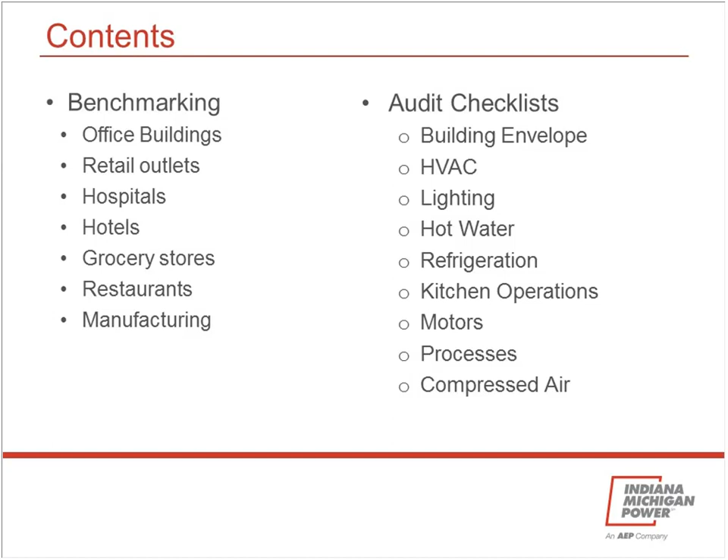And if you don't see your segment here, I'm sure there's one that's going to be very much like these, so you can slightly extrapolate for that. Then at the end we're going to leave you with a very practical checklist of things to look for to uncover energy savings opportunities in your facility. You can put these on a clipboard, walk around your facility, and check off the number of things we have in these areas. So with that, let's go ahead and start and talk about one of the most ubiquitous areas of energy consumption.

That is with commercial buildings. One of the benchmarking sources you can use out there is the Commercial Buildings Energy Consumption Survey, we call it CBECS, and it's been updated recently. Now, you might not be impressed by how early it's been updated, but the old data was from 2002. Now we're up to 2012, and there's distinct patterns of change over those 10 years.

There's generally less electricity consumption per square foot, and the mix has changed. Lighting has dropped quite a bit as a percentage share of total electricity consumption. I've put together a list of business segments here with average kilowatt hour per square foot consumption, the median, and the 25th percentile, where you'll be performing better than 75% of your peers. You can use these numbers to benchmark your facility's performance.

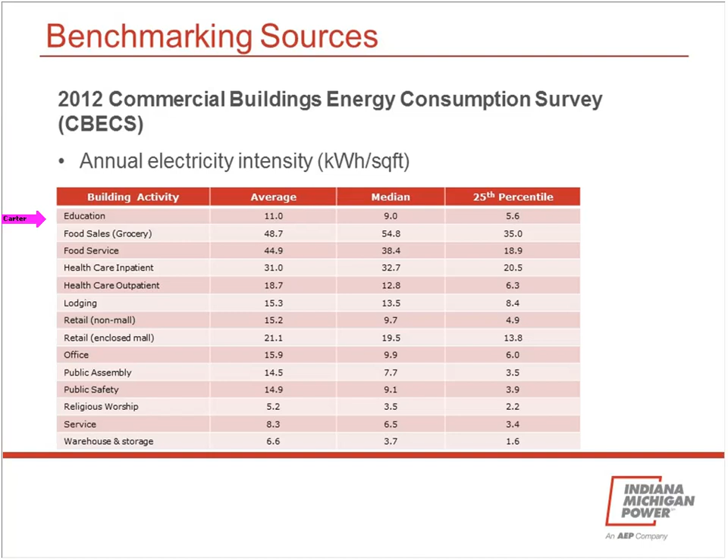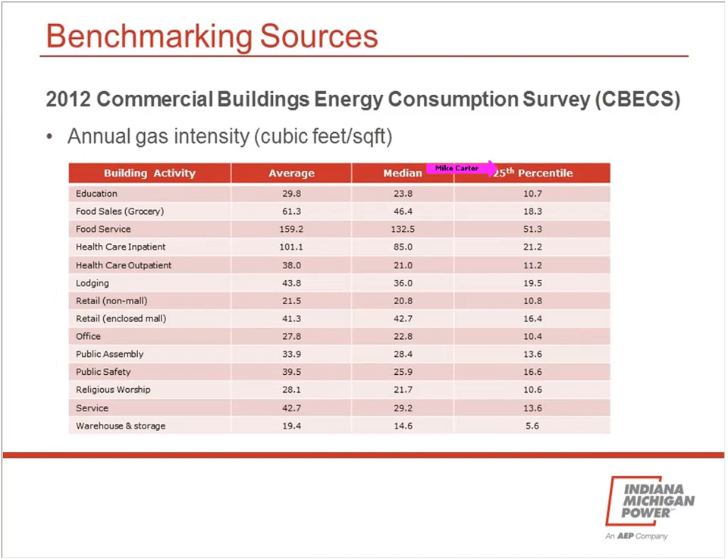We also included gas intensity. Most of you have gas as well, so I thought that might be helpful. Did the same thing: average, median, 25th percentile, in cubic feet per square foot of facility space.

Almost all of us have office space, even if you're a manufacturer. So we're going to start with that area and take a look at where energy consumption is happening in office environments. Here's the CBECS data for offices.

First thing we want to look at is, what's the overall energy benchmark here? Just short of 16 kilowatt hours per square foot total, and that's an average. Being in the Midwest, we'll kind of be in that average, though it will probably be more for southern states with higher HVAC needs, and a little less for more northern states. But that's a pretty good number.

The second thing you want to look at is, where is it being consumed? Here's a breakout in this pie chart. Ventilation is a fourth of it. Office equipment and other are both pretty much plug loads, which is a big part of that as well. If you look at ventilation and cooling, the two blue areas here, you can see that consumes about half of the office space.

Now, it used to be lighting was much higher; right now it's 16%. It used to be 30-40%, but this is 2012 data, so it really reflects just the upgrade from T12s to T5s. Today, that lighting percentage will probably be even less with LED lighting being implemented. So HVAC and plug loads are two big areas you probably want to look at for opportunities.

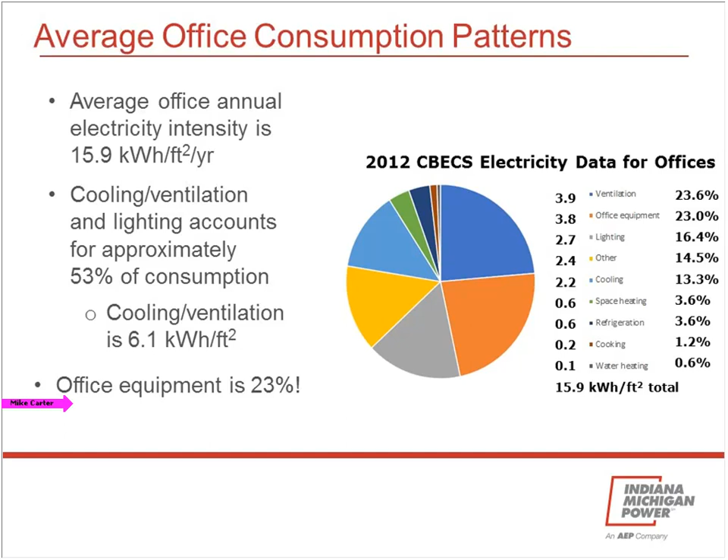So how do you use this data? Well, just take your electric bill, take an annual number. Let's say it's 1.6 million kilowatt hours of use, and you have an 80,000 square foot facility. That gives you your 20 kilowatt hours per square foot. Compare it to that 15.9 kilowatt hours per square foot average, and you can see that, well, possible improvement opportunities should be available there.

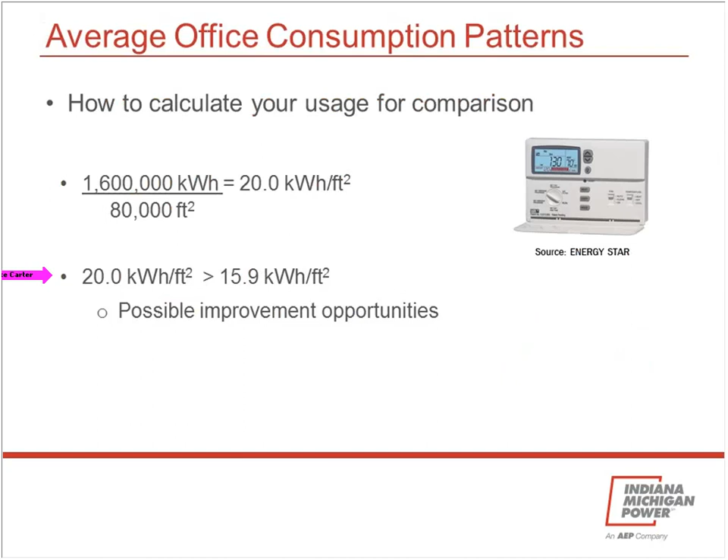And you can go to management with a hard number like this and justify continued use of resources and money to do so. If you wanted to see which area is the biggest opportunity—is it HVAC, lighting, et cetera—well, there's a couple things you can do, kind of a back-of-the-napkin type analysis.

Here's one: if you heat with natural gas, then your electricity usage is going to be pretty steady year-round for things like lighting and computers, et cetera. And the biggest difference will be in the HVAC, the air conditioning system.

And if you plotted cooling load hours—total hours that your equipment is going to operate at full capacity—mathematically, it's going to operate more hours total, but at reduced capacity, giving you an equivalent full capacity load hours versus time.

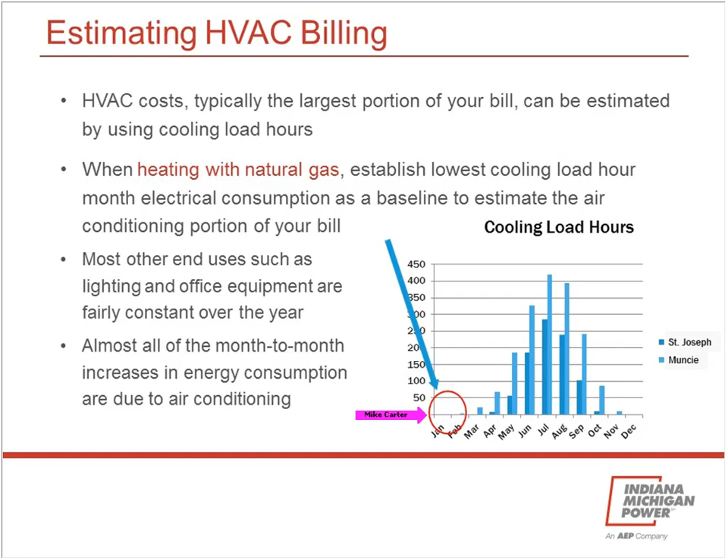You can see here that, of course, most of that occurs in the hot summer months, but in the winter months—January, February, December—hardly any, maybe a little bit. So you can say, well, I know that the biggest difference from a baseline is going to be attributed to HVAC for air conditioning.

So what you can do is take your energy consumption—this is kilowatt hours, thousands of kilowatt hours. This is an example, so it'd be very low in January, February, very high in the summer months. Total in this case, 1,500,000 or 1.5 million kilowatt hours.

And if you took, say, a rule of thumb of 80% of your winter months here, where you shouldn't expect much air conditioning, use that as a baseline, then subtract the actual minus that baseline. This difference can be attributed to your air conditioning. Now you can say, well, on this basis, I consume about 750,000 kilowatt hours in my air conditioning system over 80,000 square feet, and that's about 9.4 kilowatt hours per square foot.

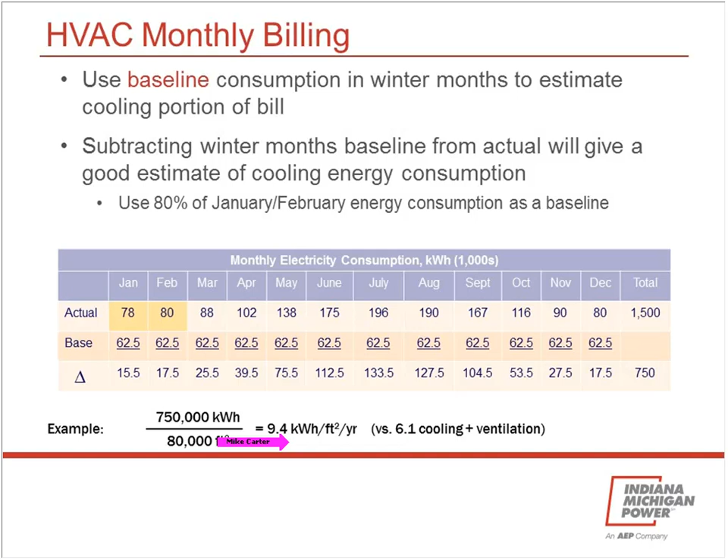And if you saw on that pie chart, HVAC, cooling, and ventilation together were about 6.1 kilowatt hours per square foot per year. Now you've just flagged, hey, it looks like maybe our HVAC system isn't efficient enough. Now, what if you heat all electric with HVAC? Heating's electric, cooling's electric.

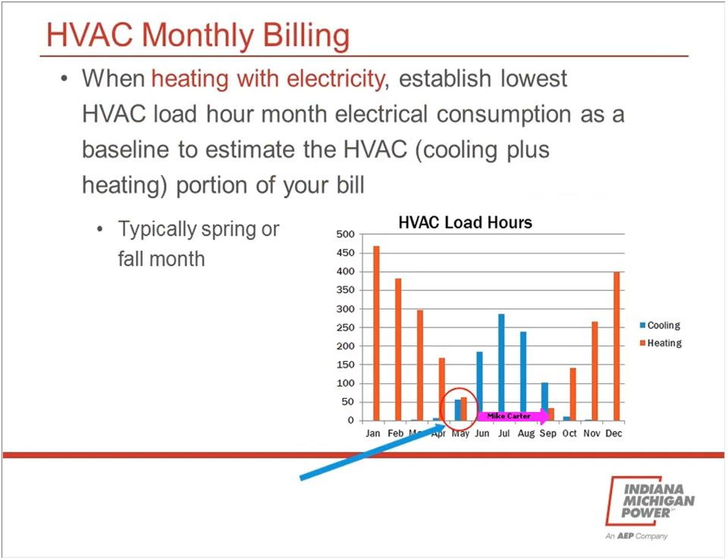If you look at the load hours, both cooling load hours and heating load hours, you're going to see another couple shoulder months in the spring and fall where you have very little HVAC contribution to your energy bill, to your electric bill in this case.

So we can do the same thing, put our actual kilowatt hour consumption, look at those shoulder months again, take about 80% of that as the baseline, and now we can say that the difference is both the heating electric consumption and cooling electric consumption together. Over 80,000 square feet, that gives us 12.3 kilowatt hours per square foot per year.

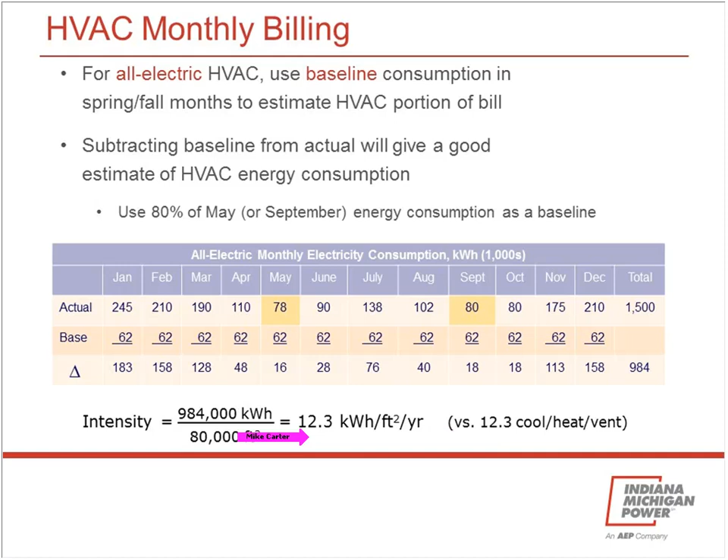If you go on the chart and convert gas heating to electric, you're going to have about 12.3 kilowatt hours per square foot versus that's about what you got here. So you can say, well, we're pretty average. Maybe we can do better, but at least that isn't a huge problem in our facility. So just a couple ways to take your electric bill and do a little math to figure out if our HVAC system is a big problem or not.

The other thing you could do is use nameplate capacity on your equipment. If you know how many tons of cooling you have, and you know the efficiency either in energy efficiency ratio or coefficient of performance, COP, you can convert that to something we call full load value, or kilowatts per ton, which lets us do some simple math to calculate the estimated energy consumption of our HVAC.

For instance, annual cooling load hours are shown here for St. Joseph and Muncie. If you have rooftop equipment, your typical efficiency might be about 1.3 kilowatts per ton, chiller 0.8 kilowatts per ton for not very efficient, older equipment. Then you just take the load in tons times that kilowatts per ton draw times the hours, because that gives you tons times kilowatts per ton is kilowatts, times hours is kilowatt hours.

You can estimate that over a cooling season, you might consume 315,000 kilowatt hours for this 300-ton total of rooftop units, or if it was a chiller, 194,000 kilowatt hours. Take that divided by whatever your square footage is — we'll use 33,000 here — and that gives 9.7 kilowatt hours per square foot.

Again, we go back to our benchmark, 6.1. You can see that you're pretty inefficient compared to average in terms of benchmarking. That's another way you can do that.

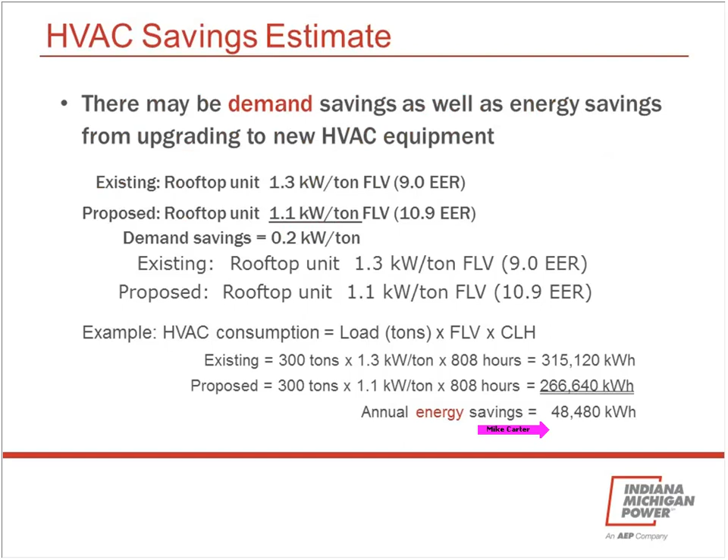Now that's energy savings. You might also have a demand savings that could be applied as well. We can go back to that kilowatt per ton number, subtract the two out, so you'd say for every ton of capacity, I'm going to reduce my peak demand by 0.2 kilowatts. I already have this energy savings, let's say at 10 cents a kilowatt hour, the 48,480 kilowatt hours.

Demand savings would be that 0.2 kilowatts per ton times 300 tons times the number — we'll use 8 as a ballpark average over, say, 8 months of the year. That would average out to about $3,800. If you add those two together, you'd have a total savings of about $8,700.

Now, how much are you going to pay for that? Let's say a 300-ton unit, you'd estimate about $500 per ton. That's a $150,000 investment. Of course, if you're just looking to get a new unit that's more efficient, that savings compared to a $150,000 investment is going to be a long payback.

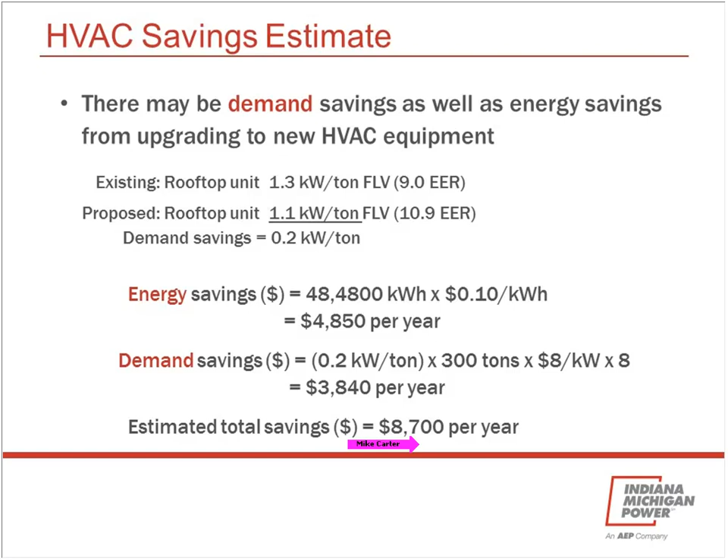But if you think of it as, well, I probably have a 10% premium on that cost — $150,000 for the standard unit versus $15,000 extra for the more efficient unit — I'm going to save $8,700 a year for that $15,000 extra payment. Now you're looking at a pretty attractive about 2-year payback. So that's how you can make that decision as well.

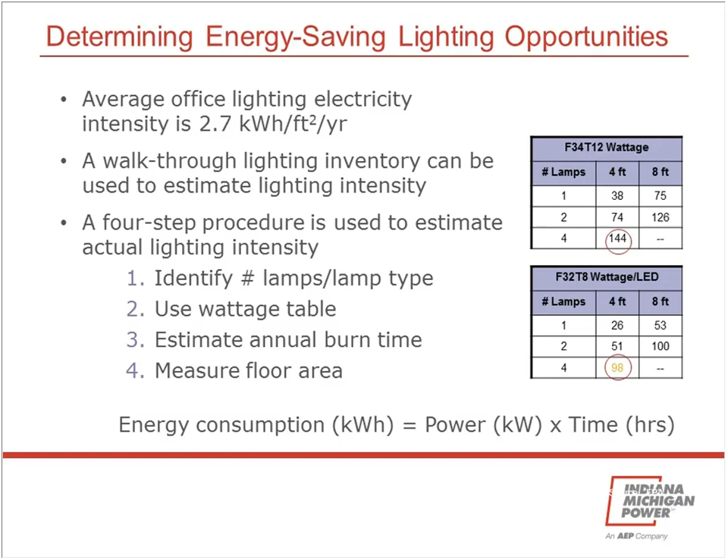So if all that sounds confusing, let me give you an example. Let's say you have a space with 40 4-foot T12 fixtures, and they operate 12 hours a day, 5 days a week, which adds up to 3,120 hours annually. The space has about 3,520 square feet. If you take your 40 fixtures times the watts, divide by 1,000 to get kilowatts, times the hours, that's going to consume about 18,000 kilowatt hours per year.

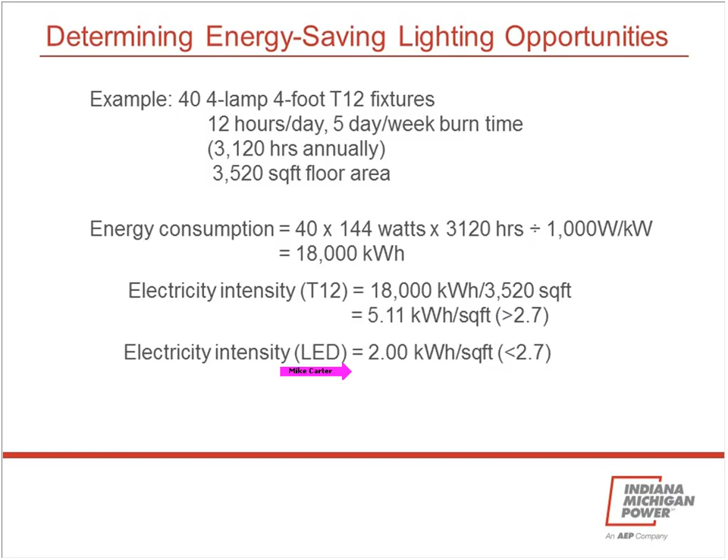Your electric intensity then is that 18,000 kilowatt hours divided by your square footage, about 5 kilowatt hours per square foot. Our benchmark was about 2.7, so you're pretty high over that. If you had T8s, you'd probably be a little above that, maybe 3.5. If you have LEDs, you can get it down to about 2 kilowatt hours per square foot, which is a lot better than average.

In terms of how much savings you can get from using occupancy sensors, bi-level switching, dimmers, or photocells - in terms of occupancy sensors, you can use tables like this that show the energy savings potential for different areas. It's going to be highest for low foot traffic areas like meeting rooms and conference rooms, not so much for offices, and particularly not in open spaces where people are always tripping the sensors so the lights are on all the time.

Let's say you have a meeting room with 6 4-lamp, 34 watt T12 fixtures. From the table, we know how many watts that consumes, times the hours, and since it's a meeting room we'll estimate about 50% savings, so we take half of that. It turns out to be 1,350 kilowatt hours a year. At 10 cents a kilowatt hour, that'd be about $135. So if you had to spend, say, $270 on the occupancy sensor, wiring, and some labor, you'd have about a 2-year payback.

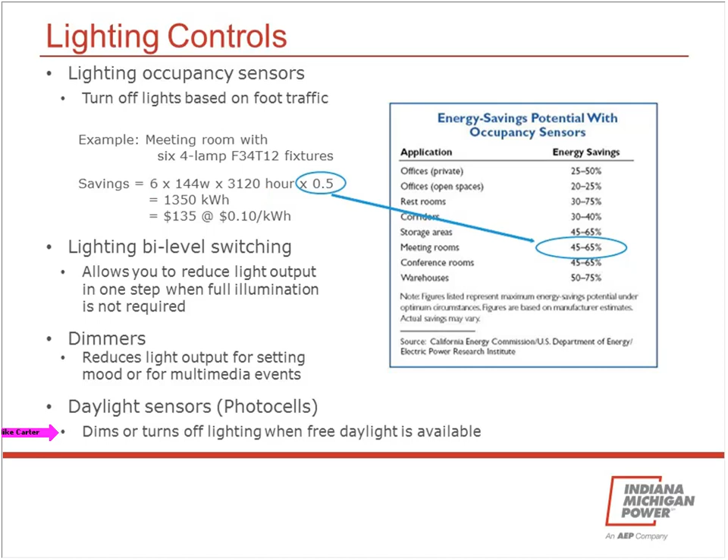Now, you can use bi-level switching. A lot of energy codes are requiring that now, where it can go from say 100% on to 50% on or even 30% on. You can use dimmers, which will be continuous rather than the step changes here, more continuous. And you can use daylight sensors as well - get that free daylight when there's enough light and turn off the artificial lights for savings.

Another area in offices especially is the presence of personal appliances. What do we mean by that? You could go over to a cubicle and find somebody has a space heater, a mini fridge, a microwave, a portable fan, a coffee pot warmer, and who knows what else. I know one of our colleagues uses a heated mouse in the wintertime to keep her hands warm, so there's a lot of energy consumption happening for personal appliances.

And that adds up. If you look at the power draw for each of these, the estimated hours they might be operating, and get the annual energy kilowatt hour consumption, add it all up, you're talking about 1,360 kilowatt hours a year per office cubicle.

At 10 cents a kilowatt hour, that's about $135. That's going to add up very quickly if you have 100, 200 employees. So what do you do?

Well, there's a couple things you can do. This is just what other people have done in offices. You could require a formal request to use those things, or you could even charge for them in some manner. It's pretty radical, but sometimes you have to take some serious steps if you have that much plug load consumption happening in your facility. Office equipment consumes a lot of energy.

Be aware that typically modern office equipment has 3 modes of operation, whether it's a desktop computer, laptop, printer, or copier. There's a typical operating power, the maximum power when it's turning out copies or processing Excel spreadsheets. Then when it sits for a while, it'll go into idle mode, and that'll be a pretty good reduction. You can see what kind of reduction here - it's a larger reduction. And a lot of systems today have even a lower energy or power draw called sleep mode.

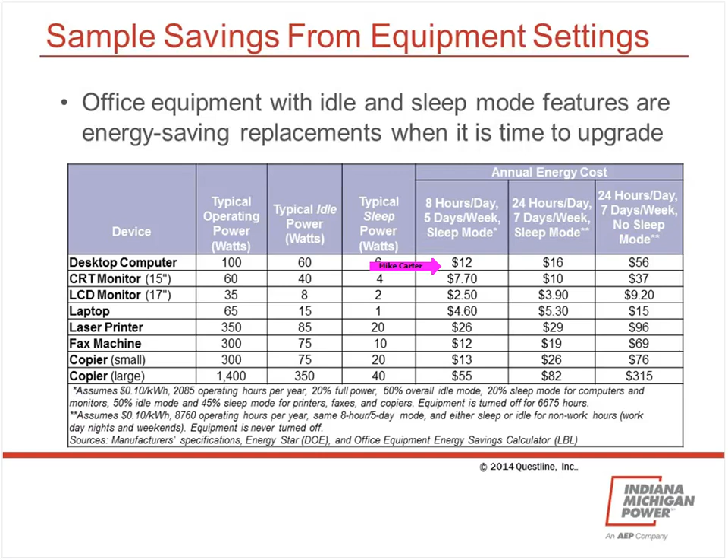Let me show you a couple other examples. Here's a desktop computer with a CRT monitor, no sleep mode versus sleep mode, running 24/7. You see the difference here, just using some simple assumptions of 10 cents a kilowatt hour. About $70 per year per computer can be achieved just by using sleep mode.

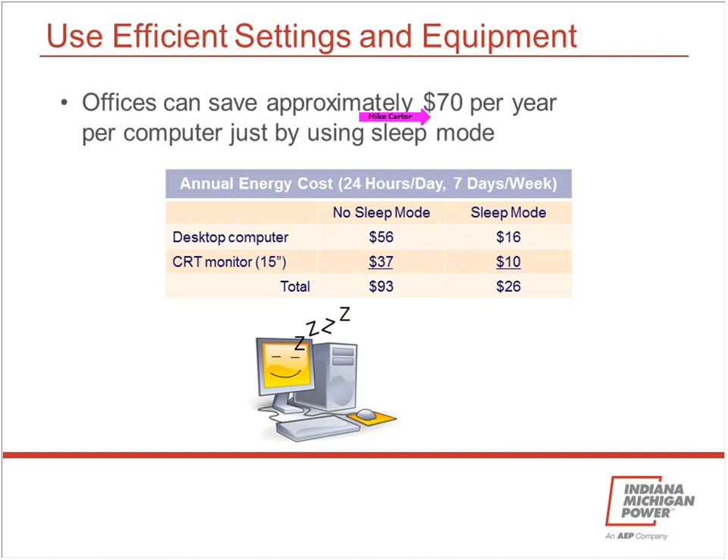There's a number of pieces of software out there. If it's not built into your computer's operating system, Verdiem has a Surveyor software. Living Life Green has what's called their CarbonWise system, and even AKS-Labs has what's called Watch Over Energy, a product out there that can monitor and control quite a few computers in this regard and achieve that kind of savings.

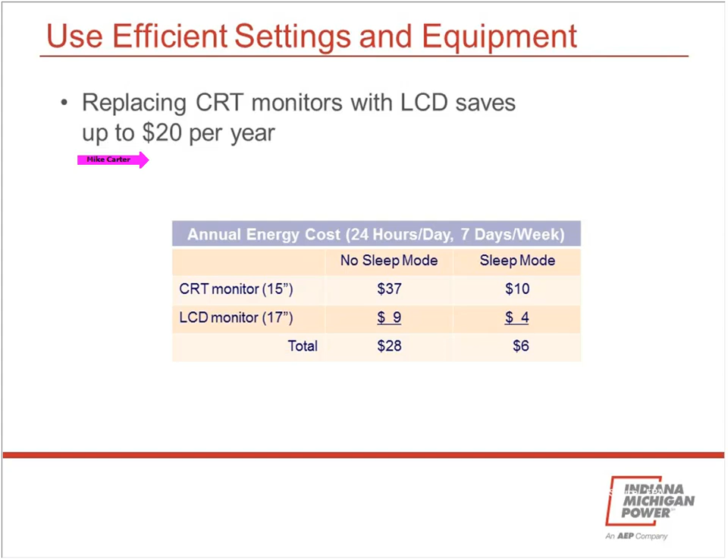If you just upgraded from CRTs to LCDs, what would that be worth? Well, if you have sleep mode, not a lot, but if you're operating without sleep mode, you can save about $20 a year, for instance. So that's how you estimate that using that table.

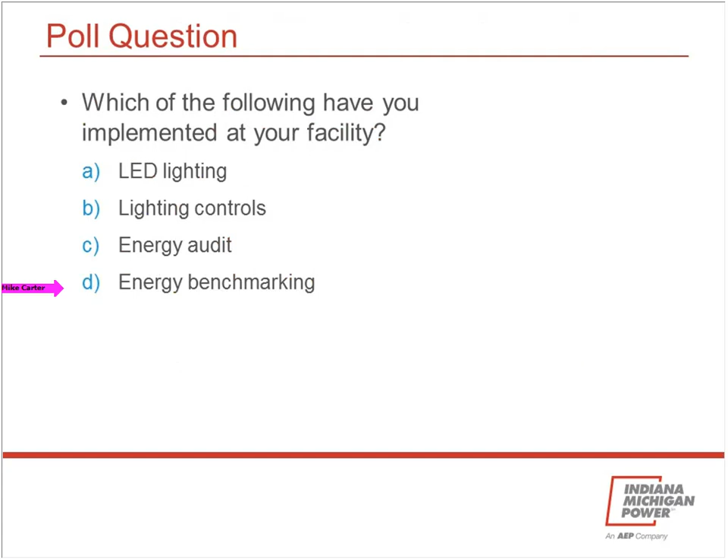So another poll question here: which of the following have you implemented at your facility? Here's 4 different things - some are energy end use things like LED lighting, lighting control, and some are process things, energy management activities. So let us know that. We'll take a look at what everyone has to say here in just a few minutes and see where we're all at today.

So that was an office environment, but everything I shared there you can apply and do the same thing to a retail outlet, and in fact to all the other business segments that I'm covering today. So I'm going to just spend a little bit of time showing you what the breakdown is for these areas, and share another tip if it's unique to that particular one.

When you jump to hospitals, boy, the story changes quite a bit. Now you're looking at twice the electricity consumption in kilowatt hours per square foot total. You're going back to cooling and ventilation being quite a large chunk, about 40% of the total.

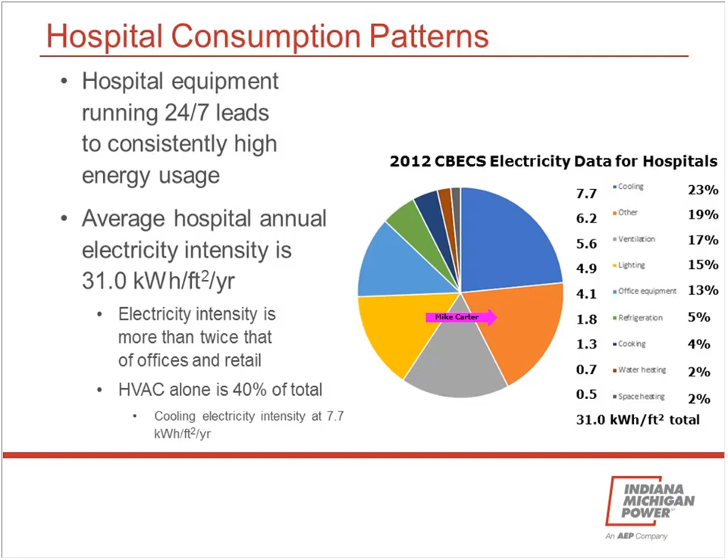Lighting is a relatively small load, and then you have a lot of plug loads, both other and office equipment. You have medical equipment, monitors, pumps, MRI machines, and that kind of thing. So there's a lot of opportunity overall in hospitals and the healthcare area.

Going to hotels and motels, lodging again is close to retail and offices. Plug loads, other, and office equipment are pretty high together, and ventilation and cooling are pretty high as well. So you have a great opportunity for HVAC upgrades and plug load reduction in the lodging area.

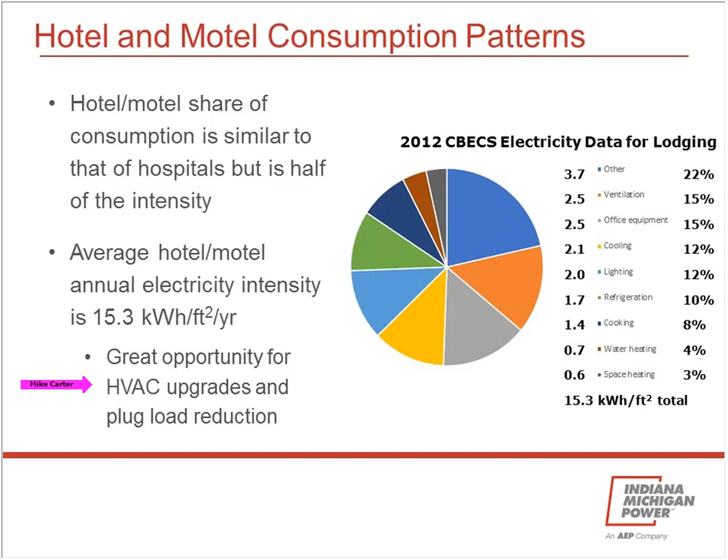And Mike, we have the results of our poll back if you'd like to share those. Thanks, Chris. So, which of the following have you implemented at your facility? People who answered this mainly cited LED lighting and lighting controls, not so much the energy management practices we're talking about today, like energy audits and energy benchmarking. So hopefully this will be of value to you, maybe something else you can try at your facility.

Let's take a look at grocery and convenience stores. This might surprise you, but it's even higher than hospitals today, almost 50 kilowatt hours per square foot total. The biggest chunk, if you look at the breakdown, is obviously refrigeration. Lighting's not a big percentage, but it's pretty high in terms of kilowatt hours per square foot, much higher than offices, about 50% higher.

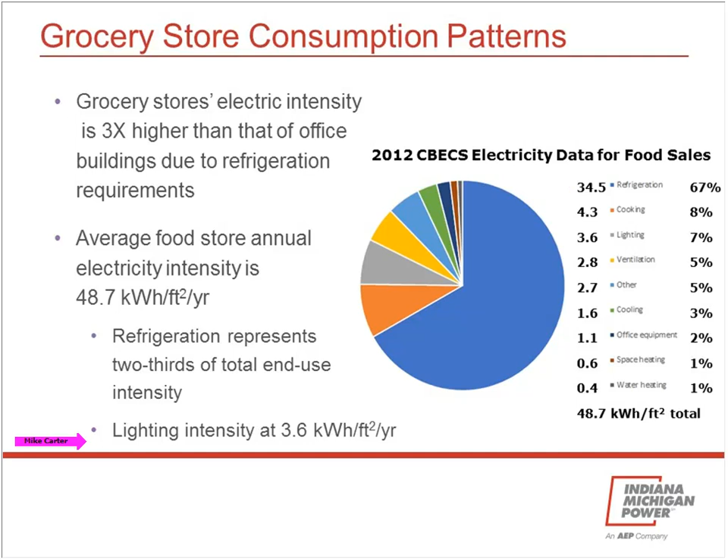Lighting would be another area to look at, particularly because of the total hours spent with the lighting on, often 24/7 in grocery and convenience store operation. And of course, in the refrigeration area, it's such a huge percentage. How can you estimate what those coolers and freezers are consuming in energy?

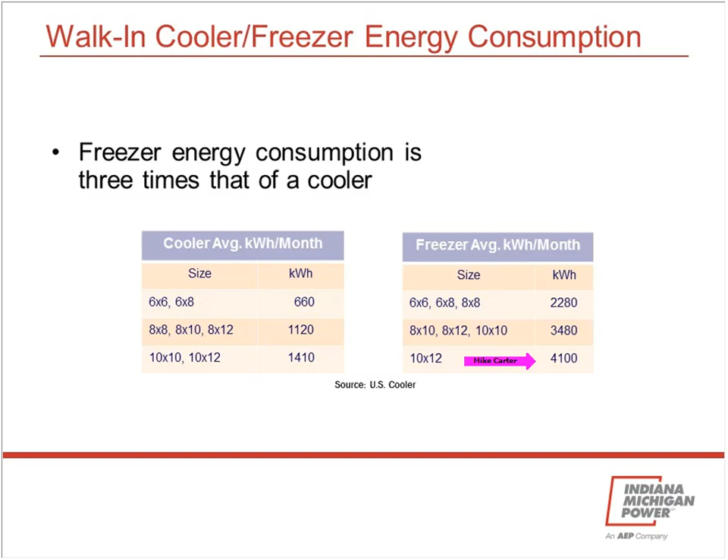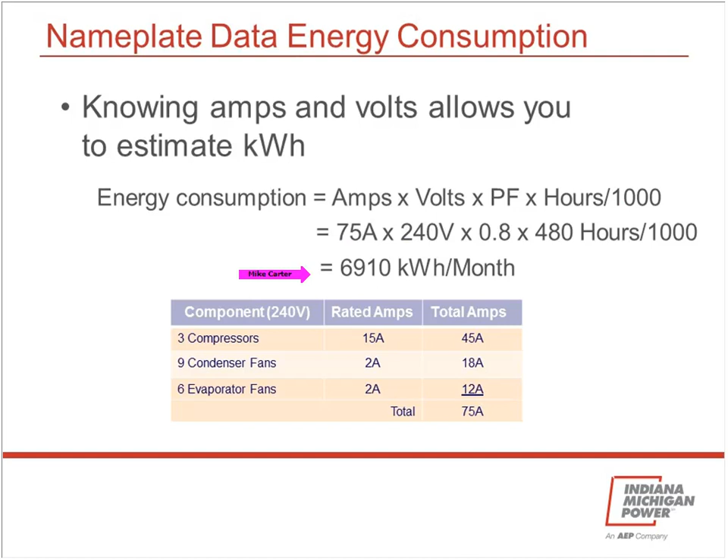If you had a 3-phase system, your voltage would be different, maybe 480 volts, and your amp reading would have to be multiplied by the square root of 3, or 1.73, to do this calculation for 3-phase operation. But this is an example of what I call the brute force method. You can do a back-of-the-napkin estimate of consumption that way as well.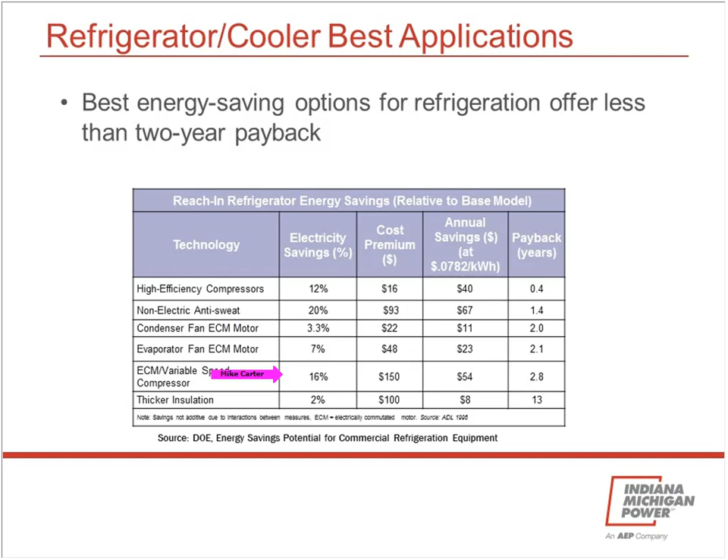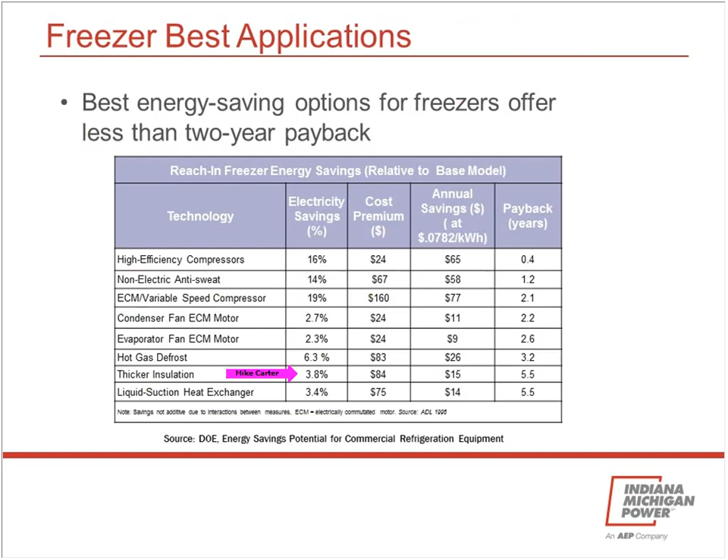And if you look at freezers, many similar things apply, even with typically higher levels of savings. So there are some good ideas to look into if you're reducing your refrigeration energy consumption. Well, that brings us to restaurants.

Again, very high electricity intensity on an annual basis, about 45 kilowatt hours per square foot. Refrigeration is a big part of it, not as big as we just saw percentage-wise, but still really high in terms of kilowatt hours per square foot. Cooking is another area, of course, in the kitchen. Cooling and ventilation are not as big on a relative scale, representing about 20% of end-use intensity.

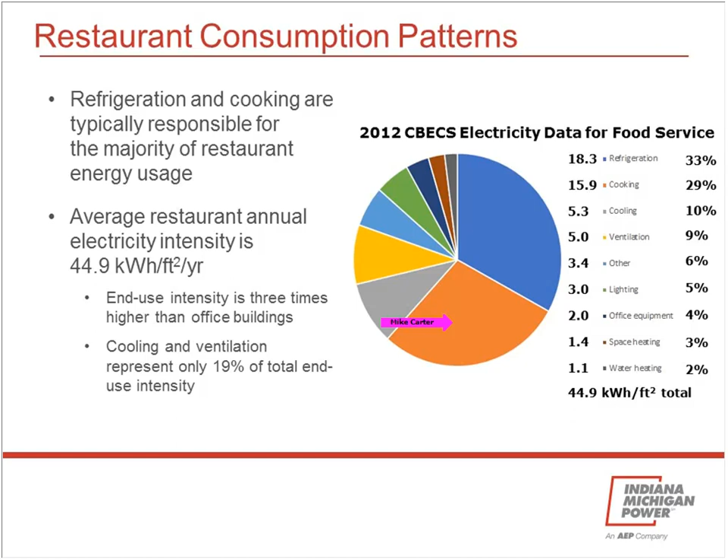So we're still looking at refrigeration opportunities, and now we're looking at cooking opportunities. We'll cover those in our audit at the end here that we're going to show you.

For manufacturing, I went back to the data source and used Manufacturing Energy Consumption Survey data. I just discovered yesterday that 2014 data is out. It was 2010 data, and they didn't have enclosed areas for 2014, so I had to take the 2014 electricity consumption divided by the square footage of floor space in some of these areas. It's a reasonable ballpark number, at least using the latest 2014 data.

Here's the consumption - you see it's quite a bit bigger than the commercial area. And again, petroleum refining is astronomical. You've got to take this with a grain of salt - it's hard to say what floor space we should be covering here. There's lights outside on catwalks and other areas, there's a lot of cooling going on in the process area, but it's again very high.

Probably a little more rigorous are numbers like newsprint mills, aluminum, copper smelting, making fertilizers, wet corn milling, paper mills - you can see maybe one of these is your area. You get down to beverage and printing, it's a lot lower, more like some of the commercial areas, fabricated metal products, et cetera.

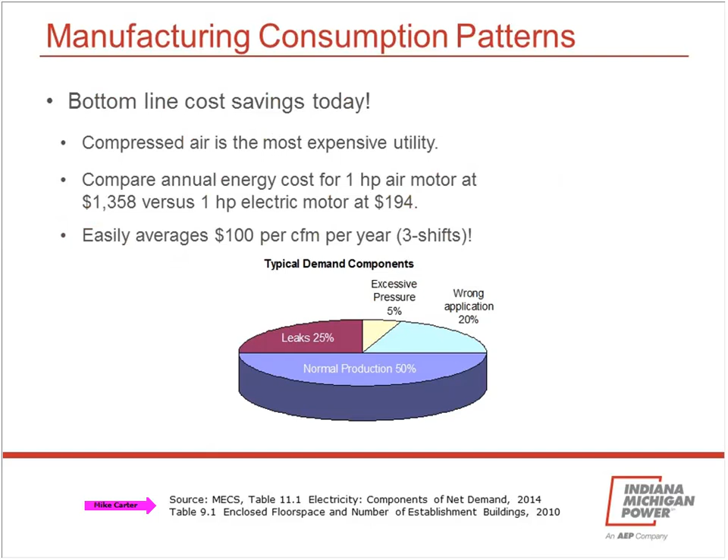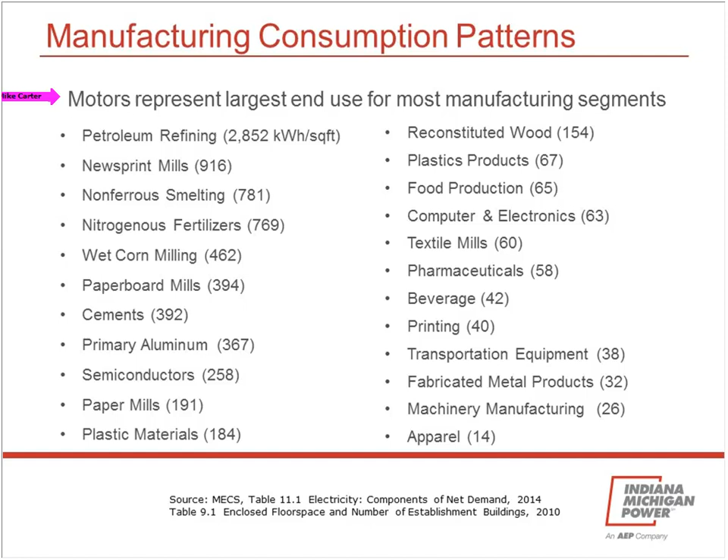One other thing here before I leave - biggest, when you look at the pie charts on these, the biggest area is motors. 40 to 50% of the total electricity consumption in a manufacturer's facility is typically motor energy consumption. One of the things motors are used for is to compress air, and we're going to have a whole webinar on this coming up November 8th where we'll get into it in great detail. But just overall, recognize compressed air is considered the most expensive utility - it's not really a utility, but it's so expensive people think of it as like the 4th utility besides electric, gas, et cetera.

If you do some math and assume it takes about 1 horsepower to produce 4 cubic feet per minute of air, you can figure that a 1 horsepower air motor would cost about $1,358 to operate a year versus a 1 horsepower electric motor at about $194. So you can see just how expensive it is to operate equipment using compressed air.

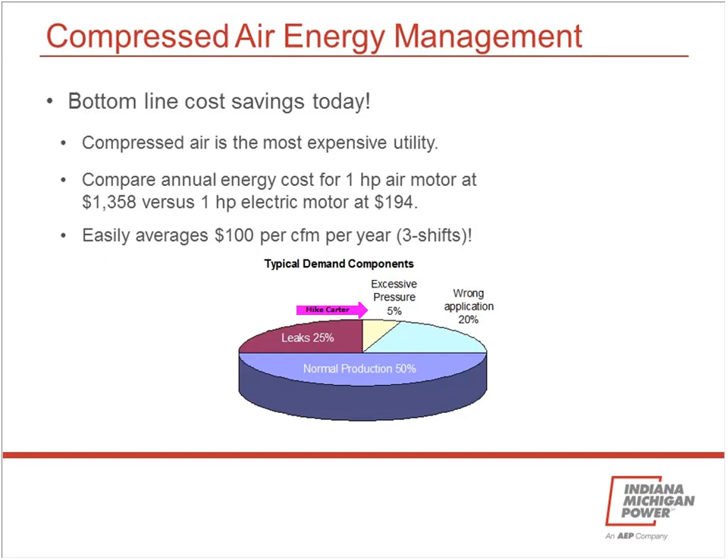Now there are other advantages to compressed air for equipment like grinders and cutters, so it's not just an energy or electric cost decision, but it is very expensive - it can easily average $100 per CFM per year. Typically, of your demand, half of what's created is actually consumed for useful work. A fourth of it often gets dissipated away in the atmosphere through leaks. A lot of times you're using wrong applications, and excessive pressure can waste energy as well. Again, show up at our November 8th webinar, we'll go into this in much more detail.

With motors, you can save energy by using variable frequency drive motors. Here's a plot of flow rates versus input power for an application where you want to reduce flow rate - you can do that through mechanical dampening like an outlet damper, inlet guide vane, disc throttle, variable pitch axial fan, whatever. Here's a plot showing that if we force a flow reduction of air or water through mechanical dampening, those are the best opportunities for VFDs.

Using an outlet damper at 50%, we're still going to operate at about 75 to 80% of power - that's not a very good deal. If we use an inlet guide vane, say in a fan application, at 50% flow rate you're going to consume about 50%, which seems pretty good - maybe that's the best you can do. But if you use a VFD, you can reduce energy consumption at 50% flow rate by slowing the motor, getting down to about 16-18%. So you can save a tremendous amount using VFDs.

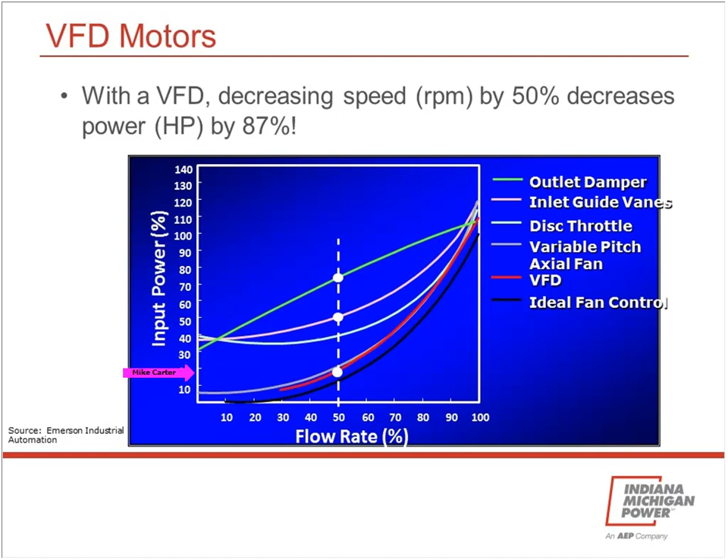Let me give you an example. Let's say you have a 50 horsepower motor - that's about 41.4 kilowatts, assuming like 85 to 90% efficiency.

50 horsepower output requires 41.4 kilowatts input of electric power, and it's operating 16 hours a day, so that's 662 kilowatt hours a day.

But let's say I don't need it to operate at full load 16 hours. I only need full load for a couple hours, and I can run it at reduced loads for many more hours, totaling more than 16 hours. So I put a table together: run it at 100%, 75, two-thirds, and half speed.

I calculated what the kilowatt hour draw would be at each of those using a VFD. At 100% load, it's actually a little higher than without a VFD because it takes energy to operate a VFD.

But when you get into 75% load, you have a table here. Here's the speeds. 75% load would be about 42% power draw at 75% speed, or 30% at 67%. And then I just calculated that kilowatt draw.

I assume you'd be running 2 hours at full operating speed, 8 hours at 3/4, 8 hours at 2/3, and 5 hours at half speed, so 23 hours total.

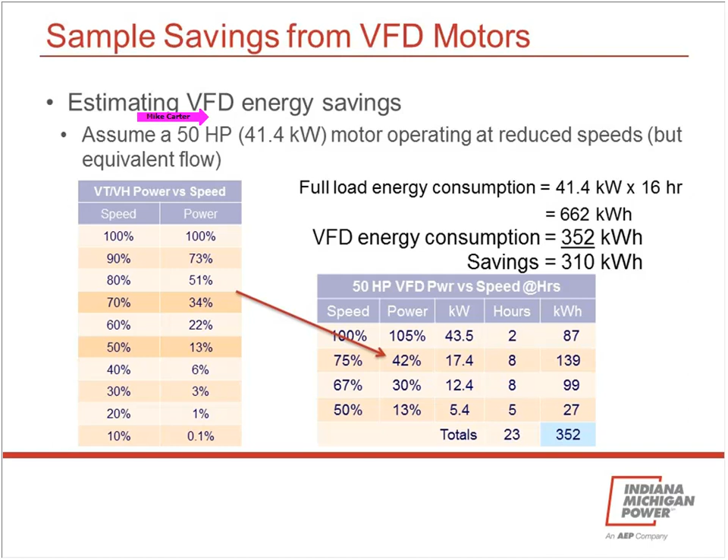You can look at this in detail after the webinar's over. You get a copy of this, and you can consider that. Now just going to very quickly run through this audit checklist.

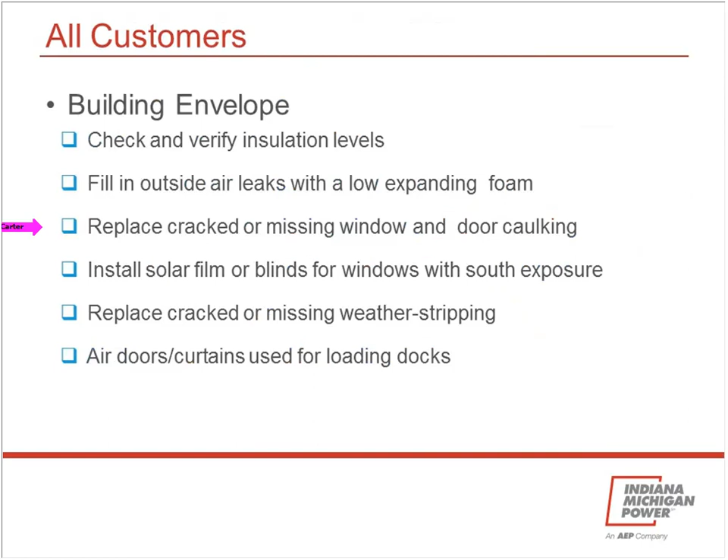For all business segments, building envelope, you can do a lot of different things. One of the big ones: replace cracked or missing window and door caulking. Take this, walk around your facility, and see if you've done these things.

If you look at HVAC operation, no matter what kind of business you are, you can do winter temperature setbacks, maybe 50 degrees overnight. You have to be concerned about not getting too cold for pipes freezing, etc. In the summertime, maybe 84 degrees setforward, but again not too high, or you'll worry about mold happening, etc., and a number of other opportunities.

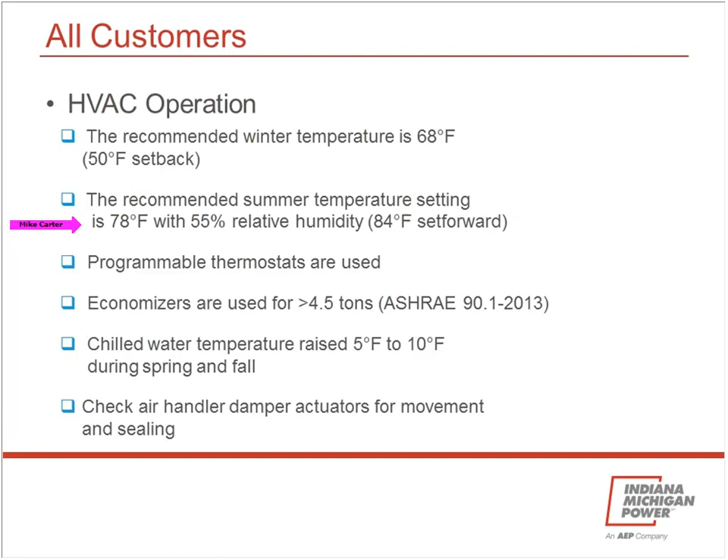If you look at HVAC maintenance, your maintenance can affect your energy consumption as well. Just check: are my registers covered up with stuff? In a university environment and dorms this is very common, maybe even hospitals and other places it can happen. There are a number of other things we show you here.

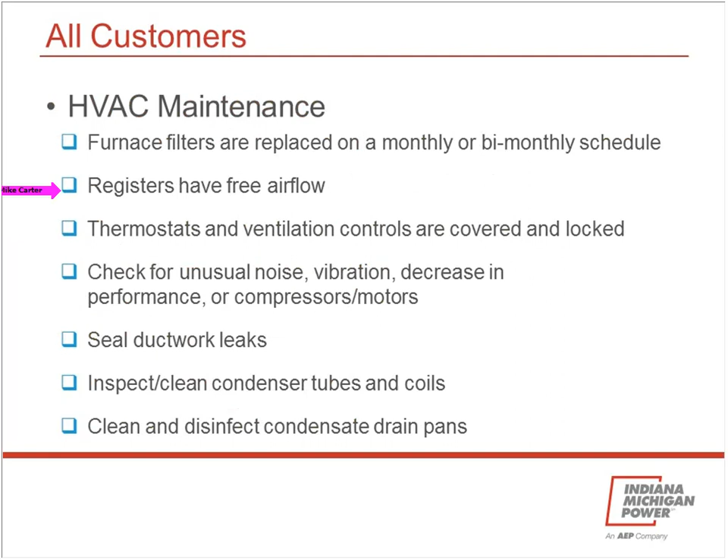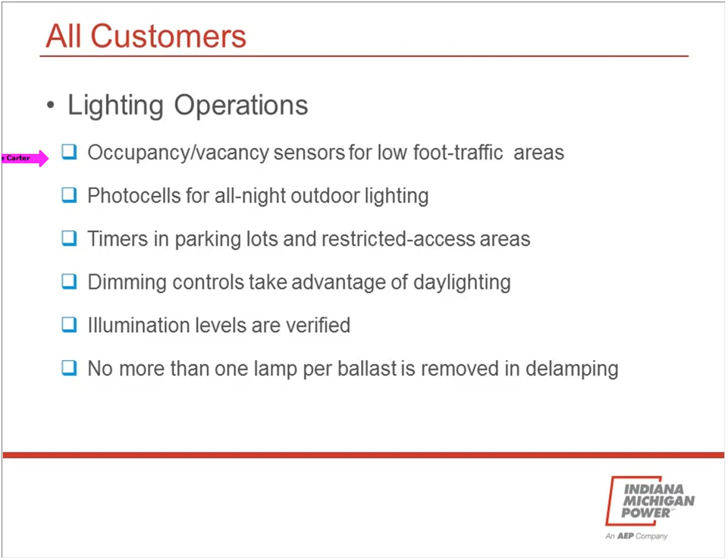For lighting, this applies to pretty much all commercial building segments. Occupancy or vacancy sensors for low foot traffic areas will always save energy, since those are areas where the lighting would tend to not have anybody there for long periods of time.

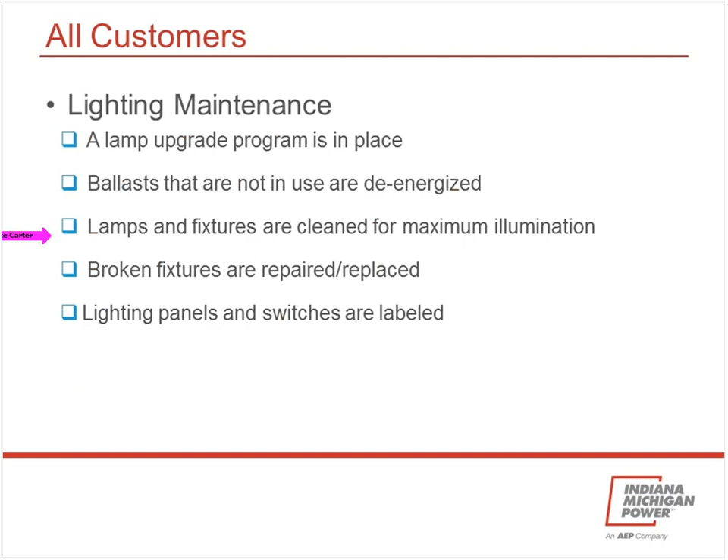In terms of lighting maintenance, take care of that lighting and make sure fixtures are clean for maximum illumination. If you're in a dirty work environment, you can really reduce that light output quite a bit. And some other things here.

Hot water thermostats and temperatures: set it no lower than 120, since you'll be concerned about Legionella. If you get too much cooler than that, it should be okay at that temperature. Also make sure water leaks are fixed, etc.

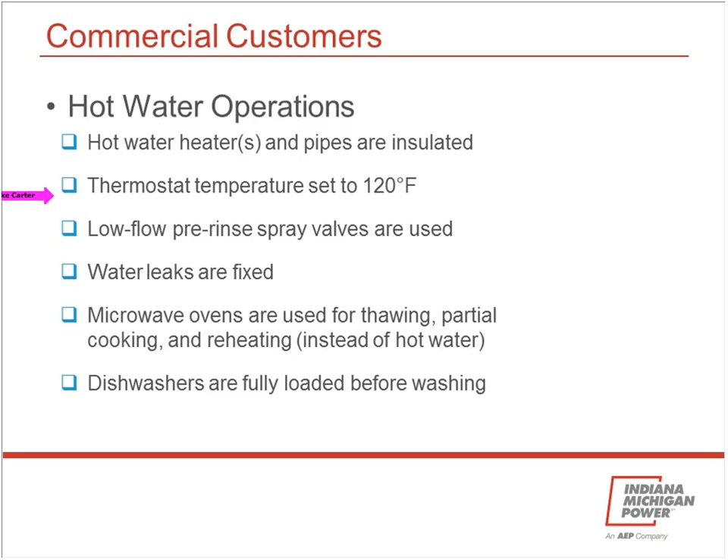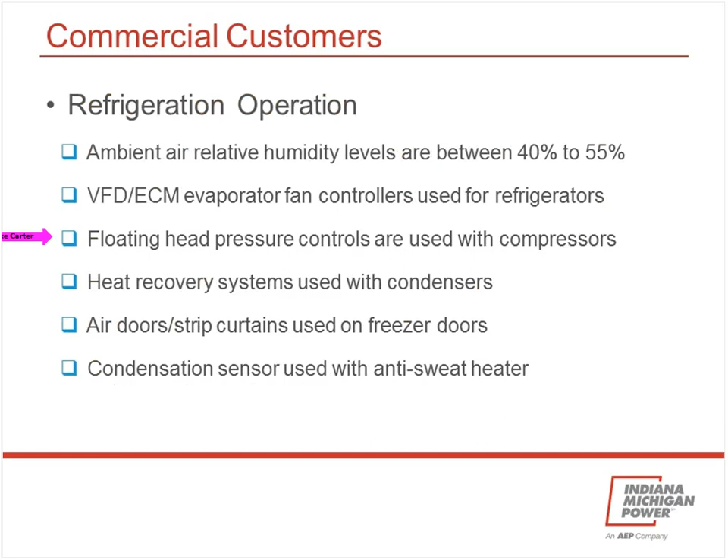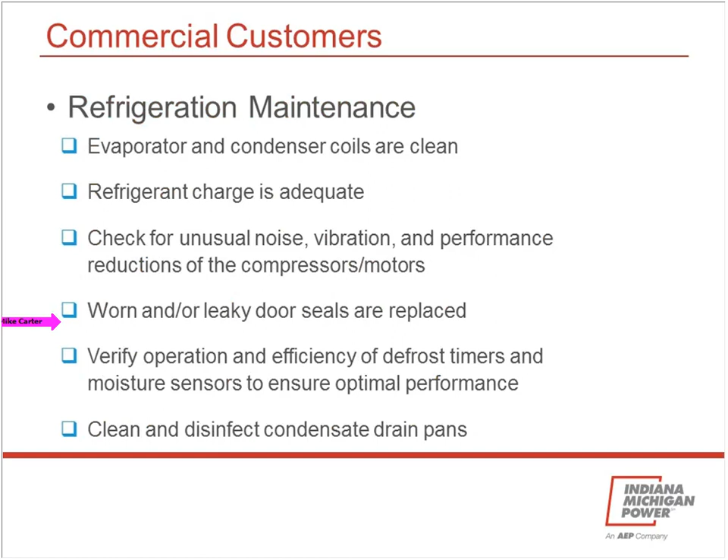If you look at refrigeration operation, make sure all the air doors and strip curtains are used on freezer doors, and use floating head pressure controls when the outside temperature is pretty cold in the fall and wintertime. In terms of maintenance, worn and leaky door seals are replaced, and automatic door closers are operating properly so there's not a big air infiltration into the cooler or freezer.

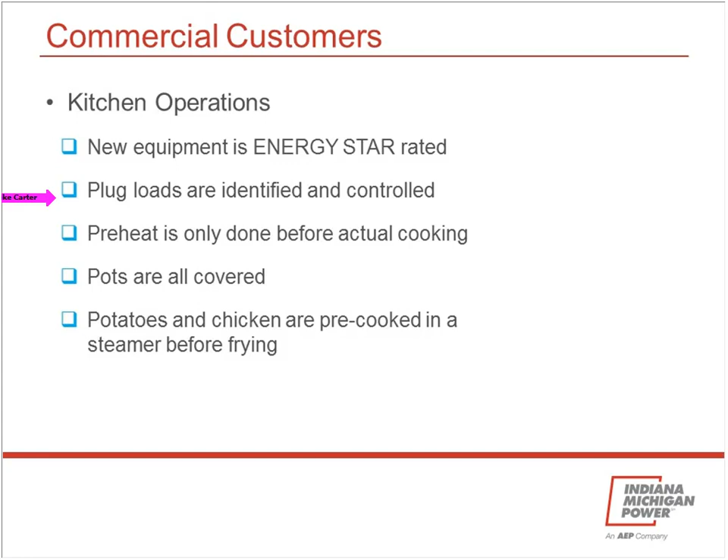Kitchen operations: plug loads are growing and growing in kitchen operations. Just look to see what's plugged into the wall and see if it needs to be unplugged for most of the day. And what else we have here.

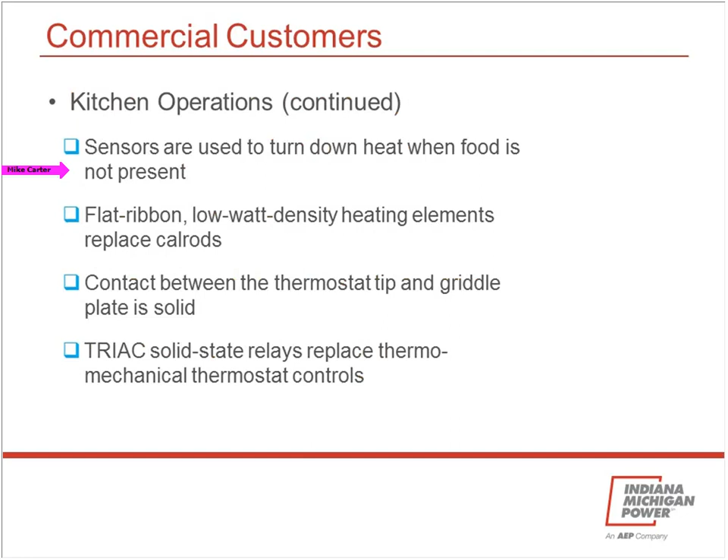Using sensors to turn down heat. If you have conveyor systems, et cetera, that could be running all the time, the heat's being on full blast and there's not even any food on the system.

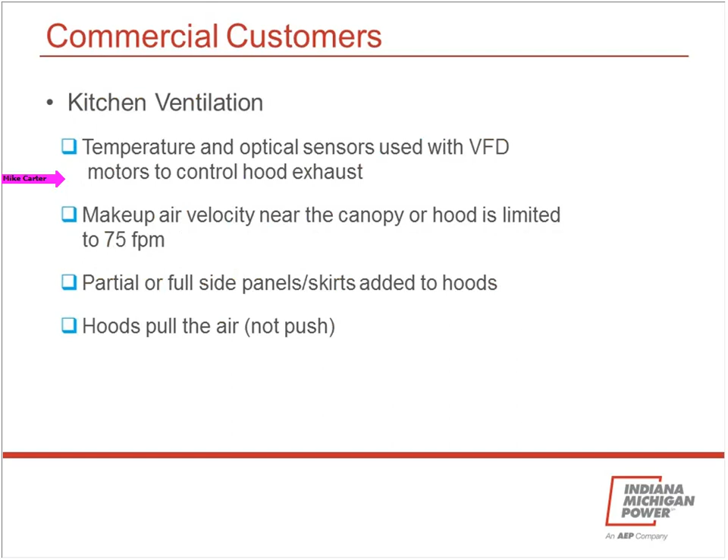In terms of kitchen ventilation, use temperature or optical sensors with your exhaust hoods. We call that demand-controlled ventilation, so that you don't exhaust indoor air through the exhaust hoods in the kitchen more than you have to.

In terms of manufacturing customers, motor operation is the big one. Use VFDs for variable torque loads when you only need to operate at full load a little part of the time. If you just need to operate at a lower level all the time, don't use a VFD - just use a gear reducer or replace the motor with a smaller motor. It's a better investment than a VFD. VFDs aren't cheap, but they save a tremendous amount for the right application.

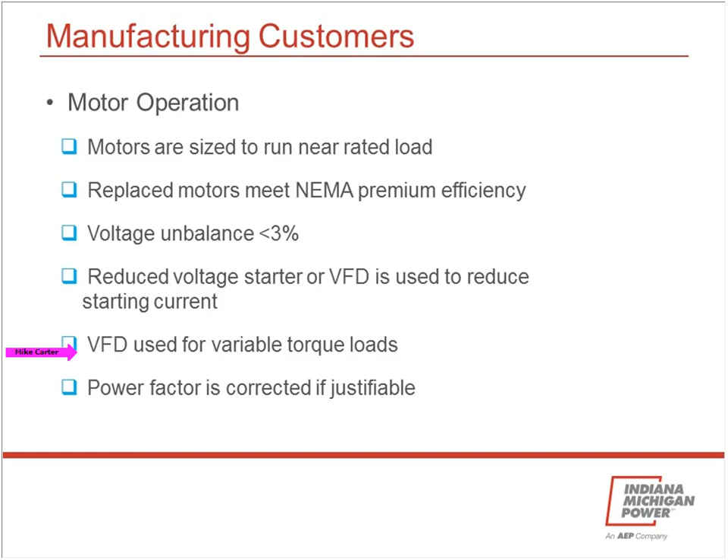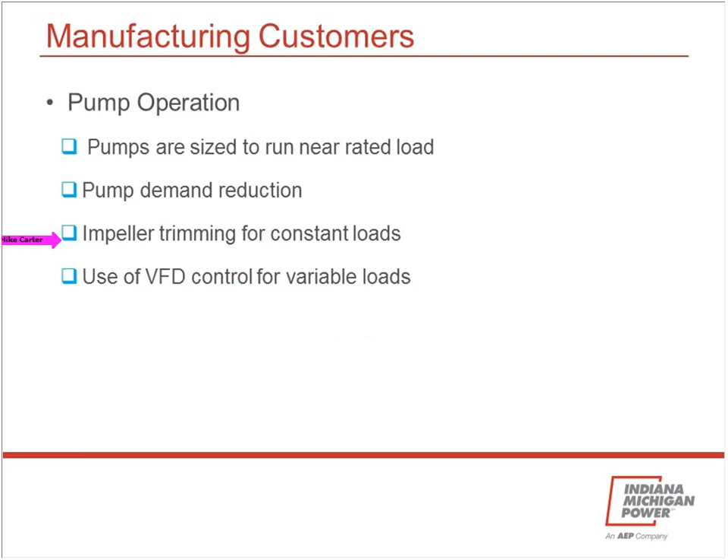The right application is when you still need to run at full rated capacity a little bit of the time, 10 or 15%, but most of the time you can run it a lot less, even if you have to run it longer. For pump operation, use a VFD for variable load pump applications. If your pump is over capacity, just use a smaller impeller - it's called impeller trimming - for constant loads, and you'll save quite a bit that way.

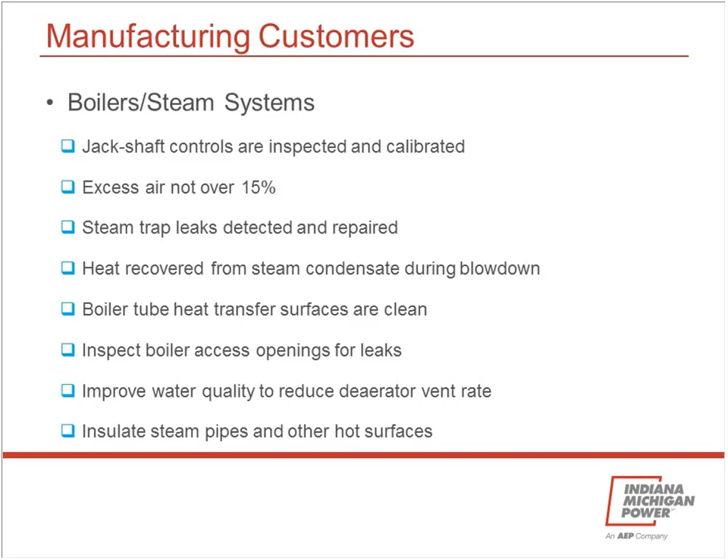We'll throw this in here for free: boilers and steam systems. Steam trap leaks should be detected and repaired. There's a number of things you can use - look here to check for those systems to save as well.

For process operations, remove power from unused transformers. A lot of times that meter will be spinning and our customers say, well, I have this empty warehouse. It's because you have power to transformers on the primary side, but there's nothing going out on the secondary side. It's still consuming energy just to create the magnetic fields in that transformer core, so there's core losses, which can be several hundred watts per transformer. It adds up. Use electro technologies like industrial heat pumps.

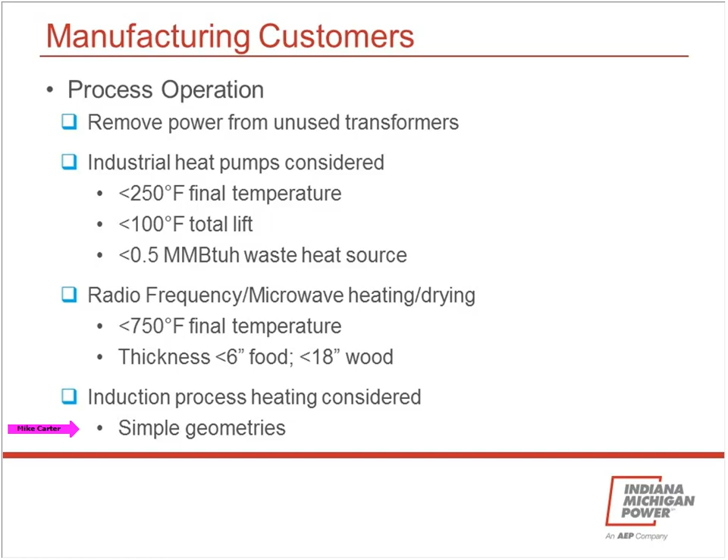If you want to heat up using waste heat from a process to heat another process up to 250 degrees, a difference of about 100 degrees, you probably need at least 500,000 BTUs of waste heat source to justify this. Radio frequency microwave heating and drying can replace gas applications, again below 750 final temperature - there's some thickness restrictions, but not too much. Induction heating as well can replace some gas heating - a very efficient heating process.

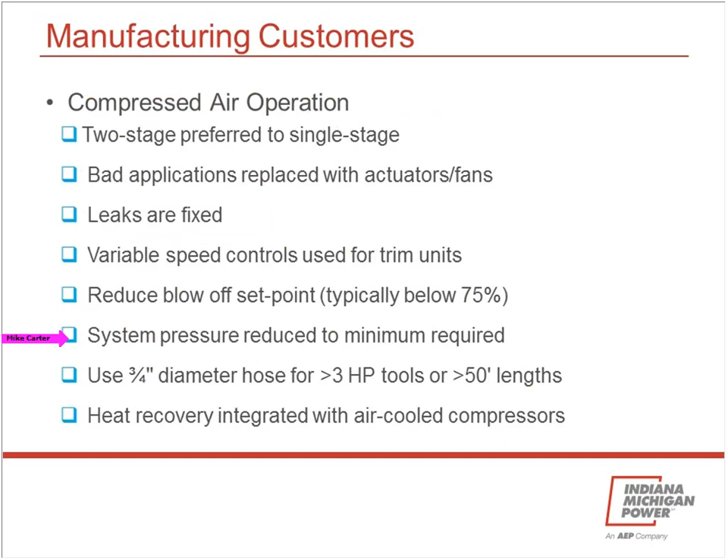We mentioned compressed air operations - don't use it for bad applications like moving product or cooling things, and consider system pressure reduction as well. Come to our November webinar and you'll hear a lot more about that.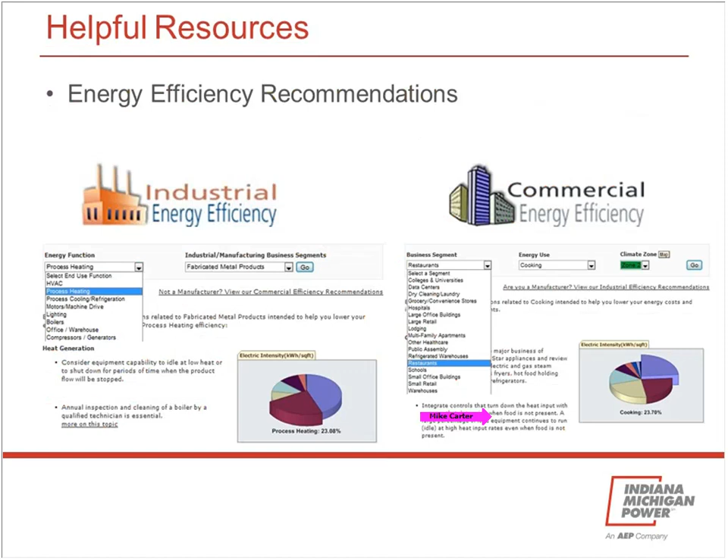If you use the commercial energy efficiency tool, you can say I'm a restaurant - you can see the different segments it has, and say I'm interested in reducing my cooking energy use. Here's a breakdown of how much that is, and here's, again, some tips. I just show a couple here - it's a long list of tips that you can implement.

Other helpful resources in terms of HVAC: here's the AHRI website. We're going to be going to the AHR Expo coming up in January to look at the latest and greatest air conditioning, heating, and refrigeration technologies there.

The DOE has a great commercial lighting solutions tool. You can do some what-if analysis there - what if I use timers on my lighting, or occupancy sensors, et cetera.

For all kitchen operations, you can look up some good information from the Fisher-Nickel Food Service Technology Center. It has calculators for cooking energy consumption, and it has reports on specific pieces of cutting-edge kitchen equipment.

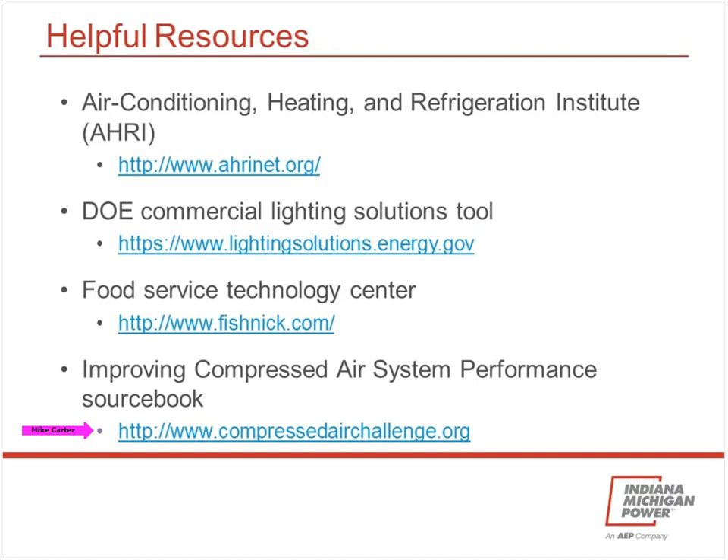And then, of course, for compressed air, the Compressed Air Challenge website is a great source of help and information on that. If you need some help with energy auditing your facility, and like to use some software that's out there, we have one. It's called the Small Business Energy Tool. It'll give you an energy report with recommendations, incentive information.

With that, I'm going to turn it over to Jason Whitman, who's going to talk a little bit more about 2017 energy efficiency programs at Indiana Michigan Power.